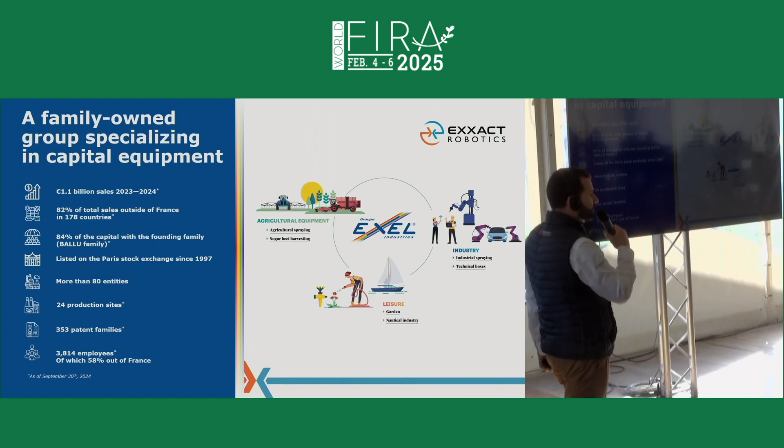More than 1 billion revenues, 80% of our sales are outside of France. However, the capital is mostly owned by a family. It's a family-owned business. There are many entities, 24 manufacturing sites, and more than 350 patents. The group today

Now, the group as a whole is important to know for you to have a background. EXXACT Robotics was founded in 2019, and the reason why it was created was to source but also help innovation mature in agricultural robotics. So it was born with a vision, if you will, and since 2019 we were able to create a 3S Spot Spray Sensor.

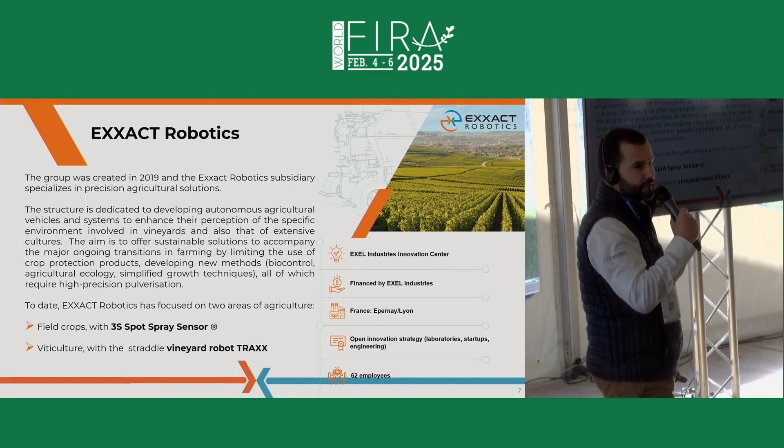It's a spot spraying sensor. That's one of our innovations, and also a gantry type of robot for vineyards named TRAXX. Currently, there are 60 employees within EXXACT Robotics, and of those 60 people, 25 are engineers or hold a PhD.

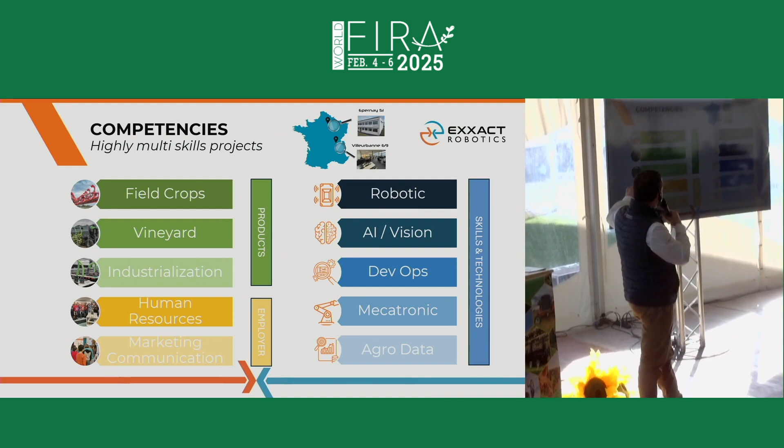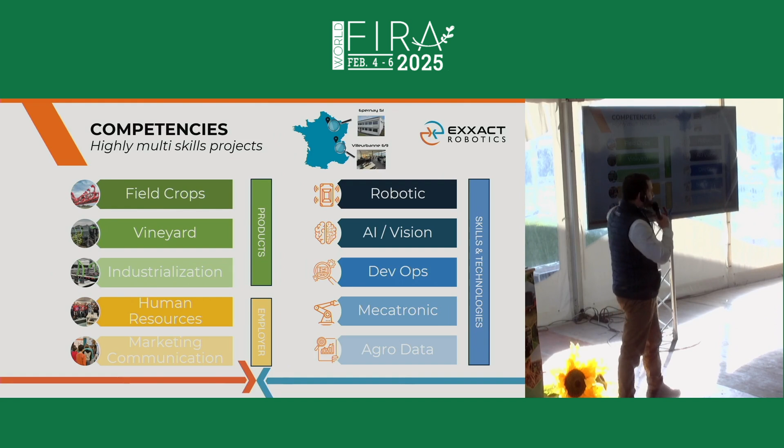So those are performance poles, if you will, the different poles. One pole is dedicated to products and large crops. Olivier, sitting here, is in charge of that pole. Then we have another segment dedicated to vineyards, one dedicated to industrialization. We have also all the support services with marketing, communication, HR, and then we have technical poles, robotics, visualization.

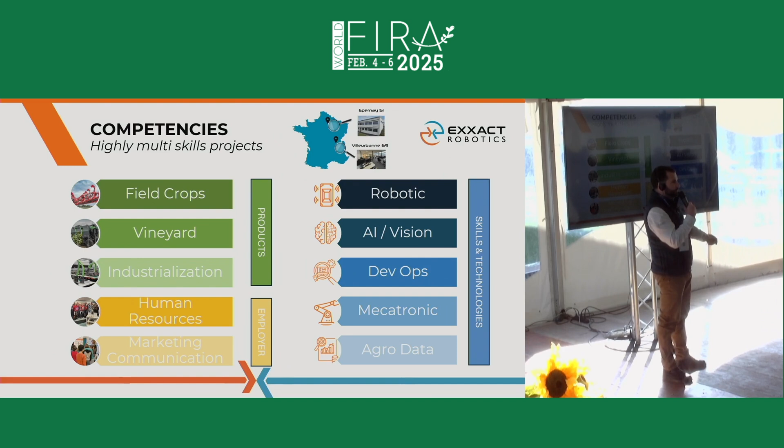Eva Stewart is in the room, responsible for that. Mechatronics with Thibault sitting here, and also a segment on agricultural data.

Now, EXXACT Robotics has an interesting history. The company is rather recent, but there's an interesting change in the structure. So in 2019, we started off with a vision.

The 2 products I mentioned were marketed in 2023, and again, we operate within a larger umbrella group, and our roadmap is such that we want to co-design our future innovation with the other actors of the group. So we operate like a startup, if you will.

So we are a startup in a larger group. And we also want to be perceived as an R&D center and innovation center for all the other brands of our group. So we're here to innovate for our brands, but we also want to attract new talents. We work on high-end technology, and we want to provide innovation to the Exel group to be more sovereign in matters of innovation. So we want to innovate in-house, if you will.

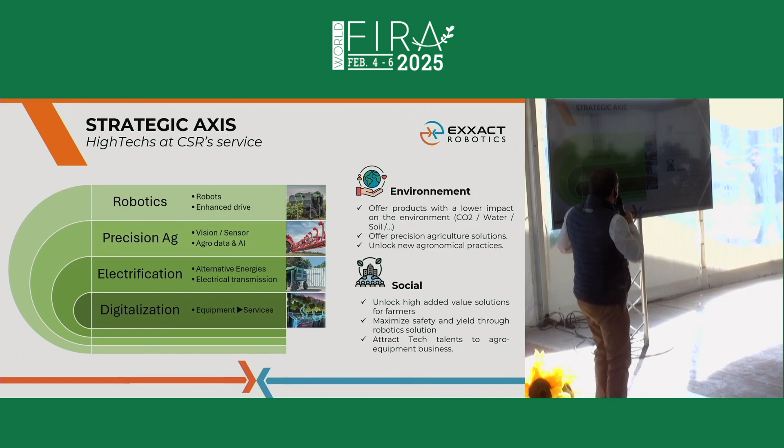Now, if I were to explain that in a few words, those are the different axes that we try to follow. Robotics, we want to develop and automate as much as possible agricultural robots. Precision agriculture is one of our areas of expertise. Olivier will introduce you to one of our latest innovations in spot spraying.

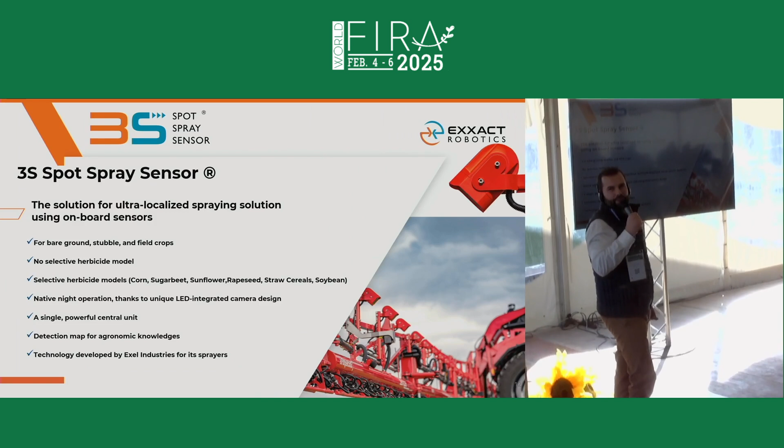Electrification, well, or rather, we want to use other types, alternate sources of energy, and then digitalization of the different equipment. I'm going to hand over to Olivier, who is the product manager and manager of the agriculture segment. He's going to talk about the spot spray module.

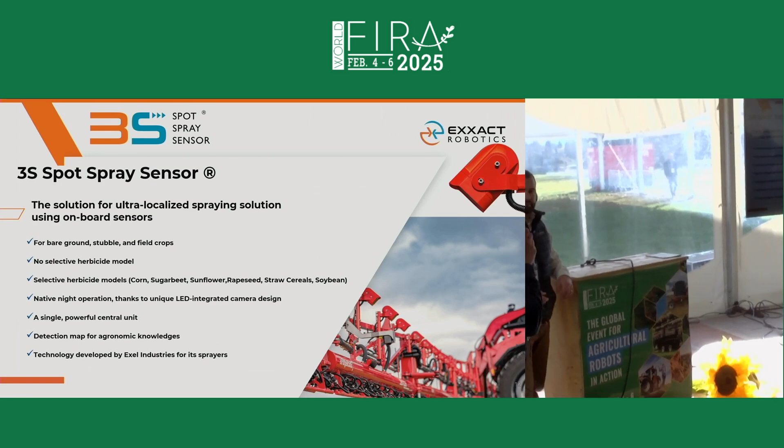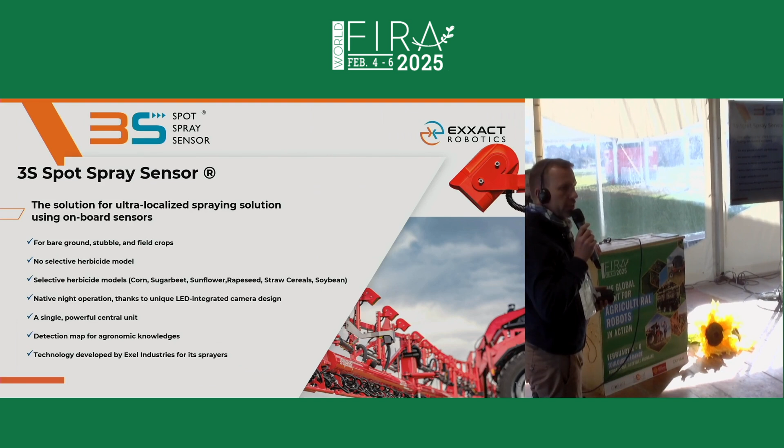So as Guillaume just said, we designed a localized spray device. It's the 3S Spot Spray Sensor. So cameras are fitted on the device, and you have real-time analysis, data analysis boosted with AI.

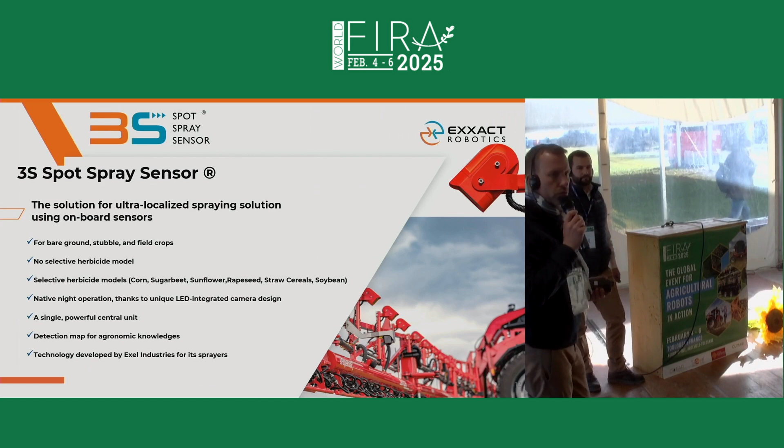So we operate either on soil already with crops, or empty plots, crops. And so we use selective herbicides. We are compatible with rapeseed, with corn, wheat, and soy as well.

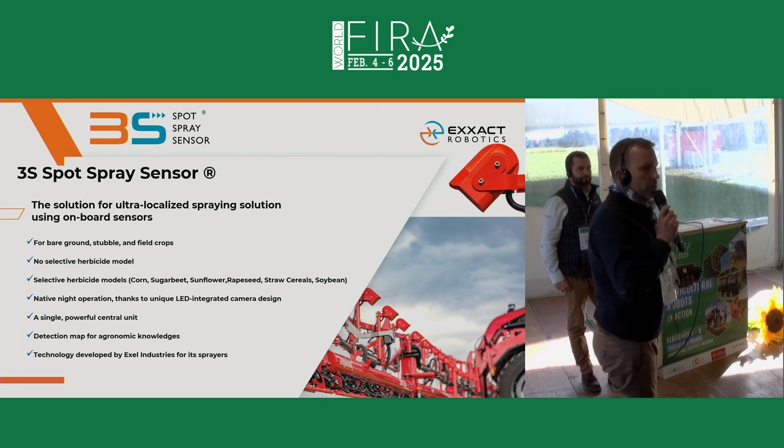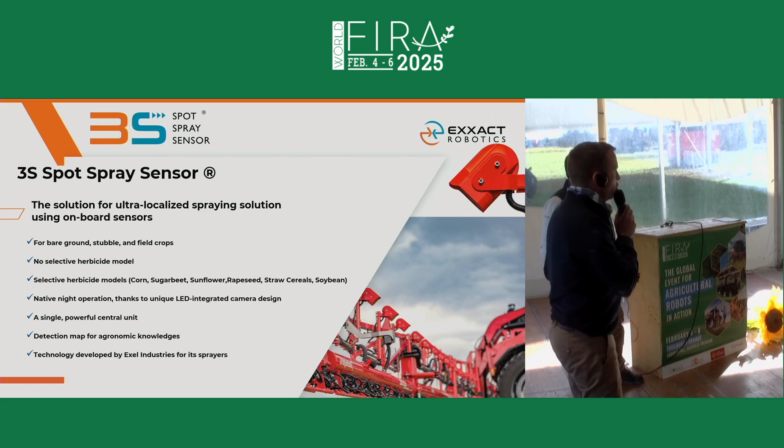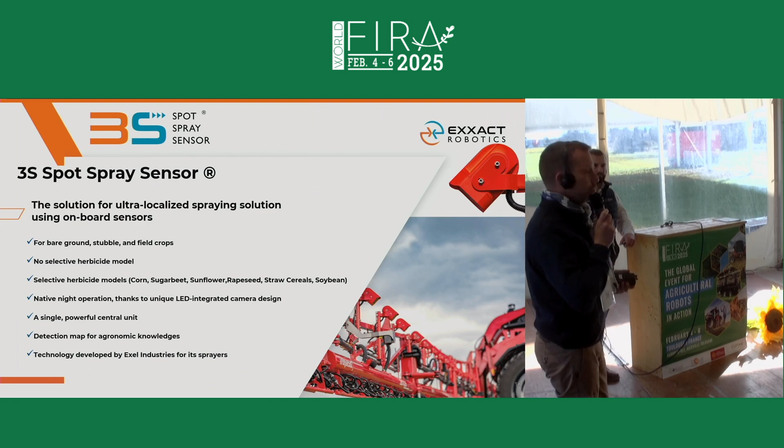One of the features of that system is that the camera is also compatible with night work. This is a strong demand by our partners. And so by design, there's an integrated light. And so you can operate the robot at night as well. What's also very important, we generate obviously quite a wealth of data, and again it's developed in-house. So this is the sensor that will be fitted on all of our sprayers.

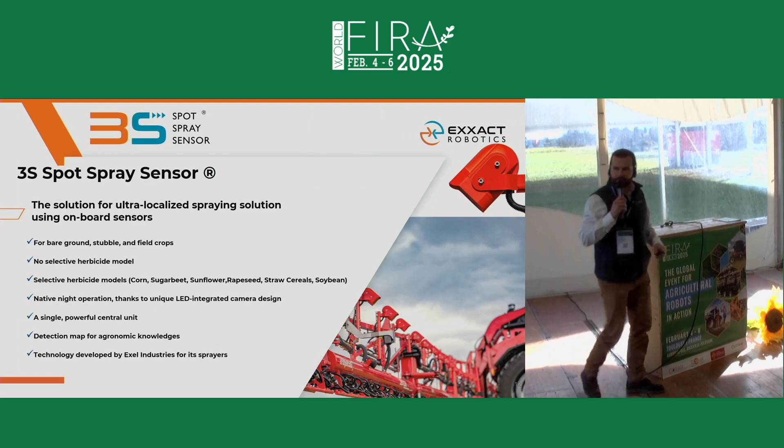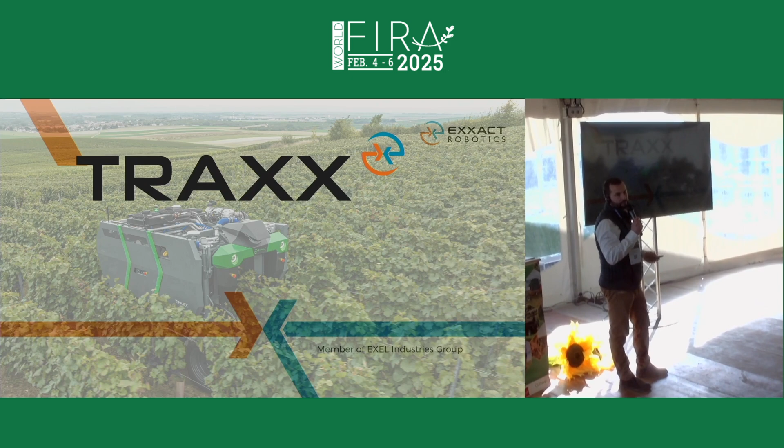Another innovation, the TRAXX robot. The robot is available at booth number 22. The robot will be demonstrated outside at 4:15.

It all started with an idea. We had many demands from the industry, for the wine industry. In the wine industry, there's a lot of manual work, maybe 80%, and the rest of it requires intensive labor.

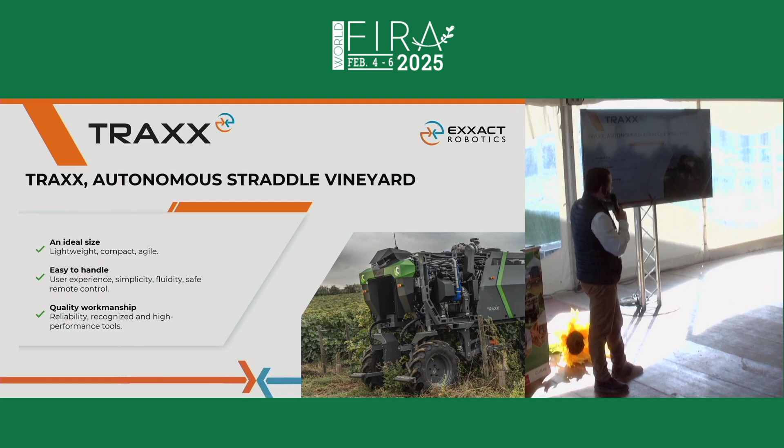There's a strong demand by the industry. They want to have the ability to perform those tasks in autonomy. The robot by design is light, 2 times lighter than a similar product, easy to use, and a robot thanks to

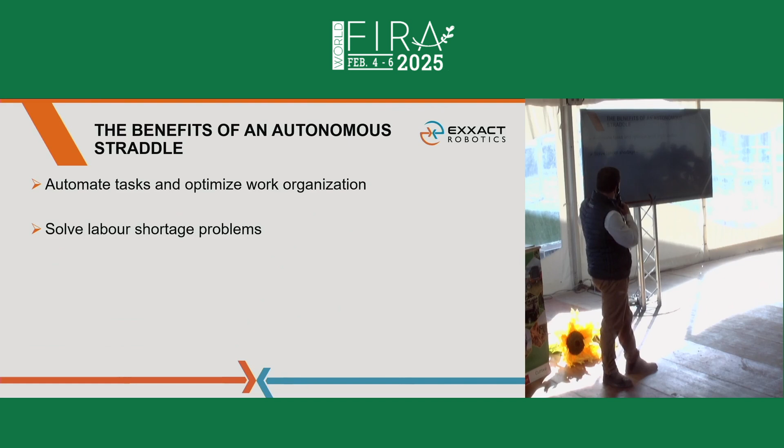which you can be accurate and do quality work in the vineyard. So as I said, the industry wants to automate the different tasks because of workforce issues and recruitment concerns. It's extremely difficult to find tractor drivers or operators, and the industry would like to become more autonomous and compensate for the lack of workforce.

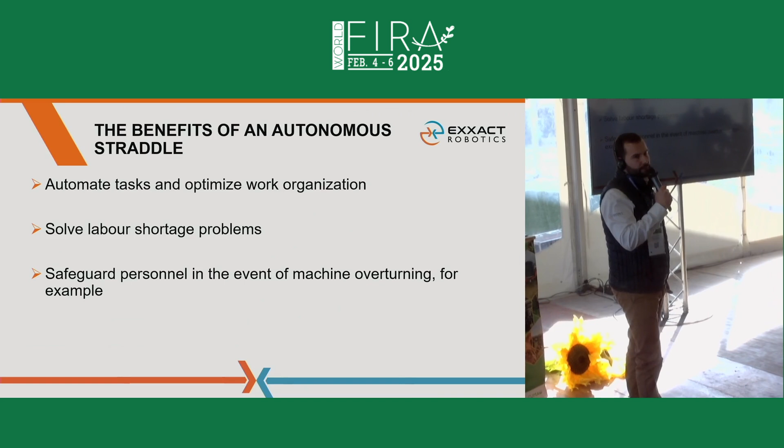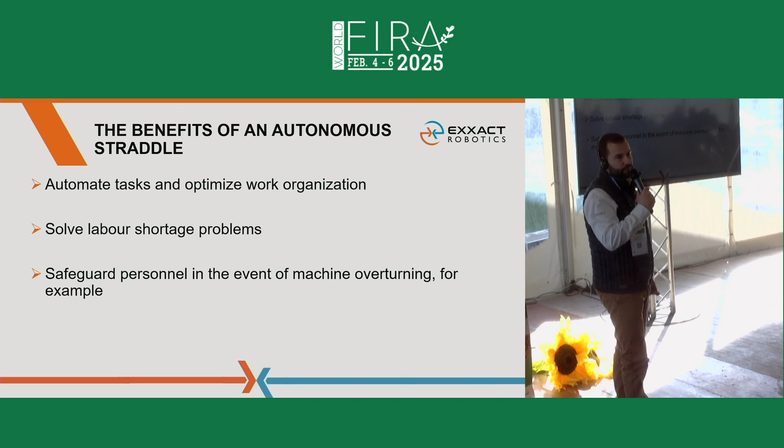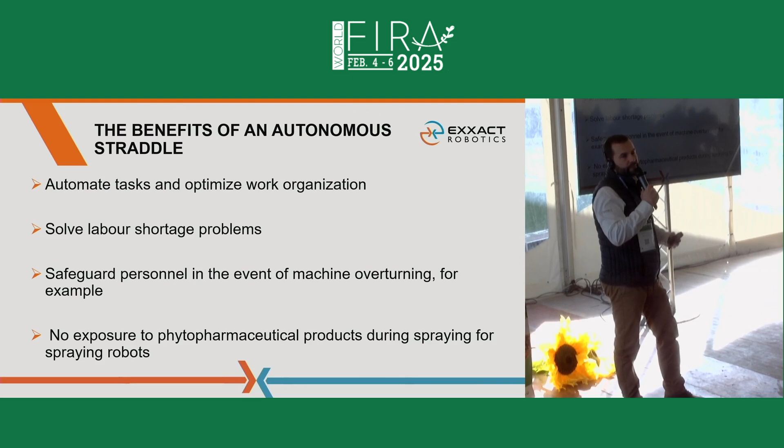As I said, the wine industry is very specific in that quite often plants or vines are planted on slopes, and we need a light device where the gravity center is low, and also of course it's a plus if there is no driver, because when the tractor is tumbling over, there may be a high risk to the driver. So again, there's a strong demand in that respect.

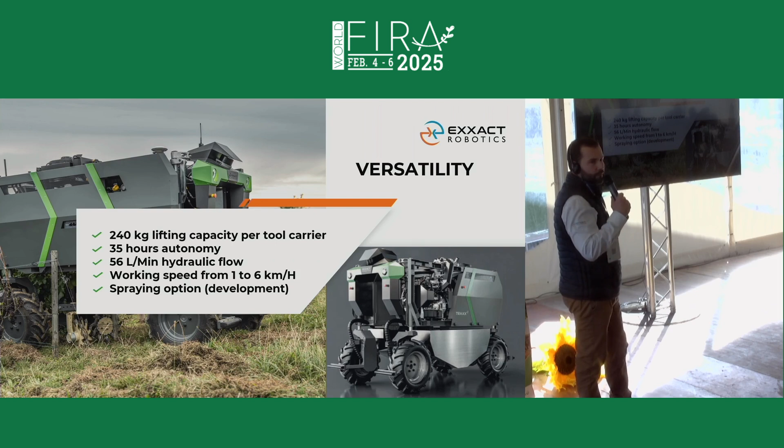Very quickly, in a few words, it's a straddling diesel robot, 56 horsepower, 4 hydrostatic engines, 4 wheels.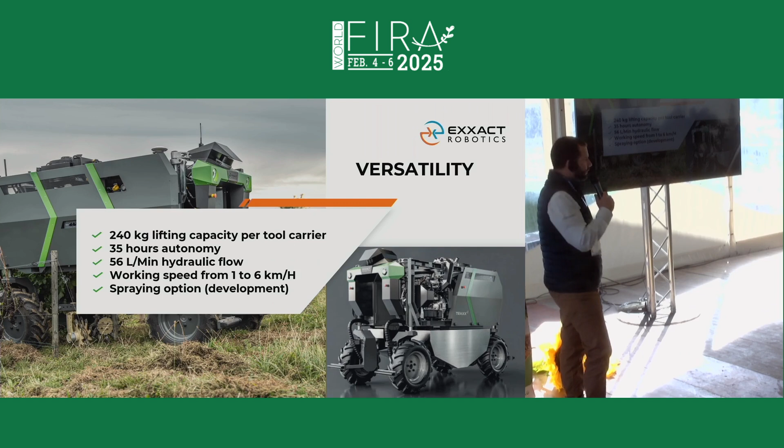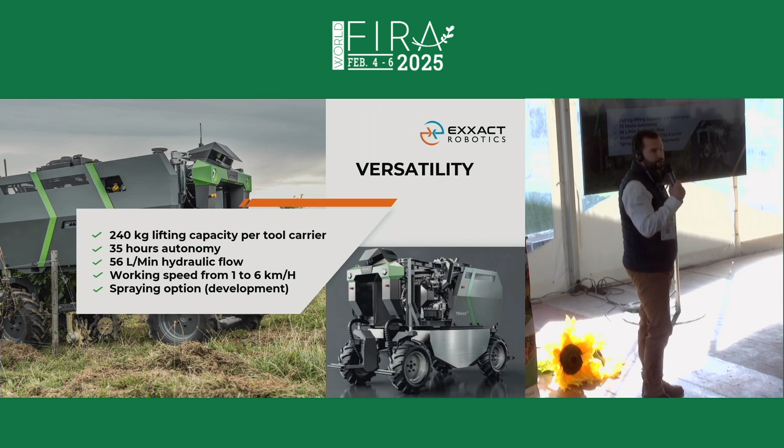The autonomy is 35 hours, so you can drive between 1 and 6 kilometers per hour. You can lift up to 240 kilograms of implement, and we are also currently developing a new option, a spraying implement.

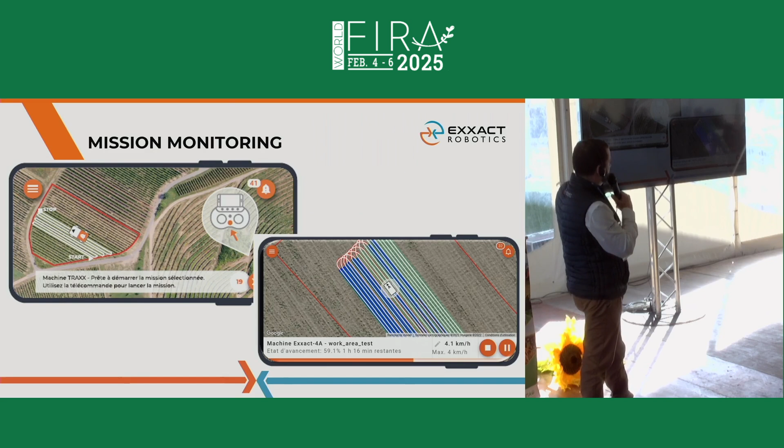Concretely, we're talking about an RTK guided device. So you first need to map out the plot, but then there's a cloud-based interface which you can manage via a smartphone. You use a remote control, and it's autonomous in that you can start the missions directly from your smartphone.

If you'd like more information on TRAXX, do not hesitate, it will be demonstrated. Camille on the line is the project manager, he will answer any technical question you have on the product.

Today, this innovation is mature, already industrialized and marketed by Tecnoma. In the roadmap, if you remember, I explained that what we do is create something innovative, and then we transfer the project, if you will, when it's ready for market.

Another option is concept H2, more for explanatory purposes, where we try to assess the possibility of using alternate energy resources. The objective was to use a hydrogen battery and explore its capacities and potential. So it's a TRAXX robot, but instead of a diesel engine you have a hydrogen generator, and we are also trying something even more optimized. Inside, we want to study the entire hydrogen ecosystem from a technical standpoint, but also the safety features, and think about the entire ecosystem, like where you're going to source your hydrogen.

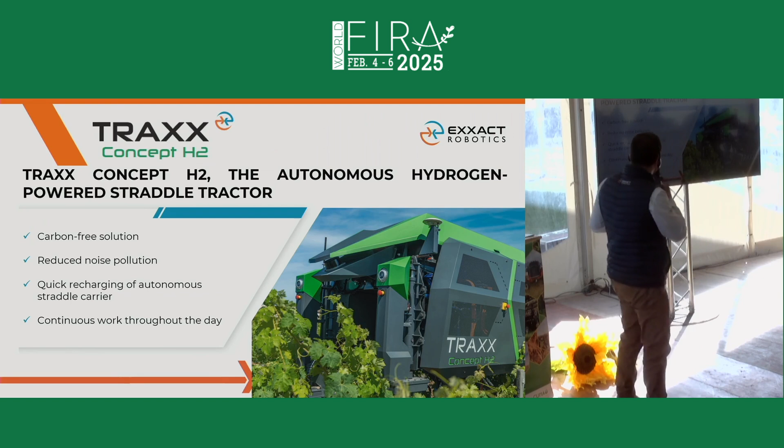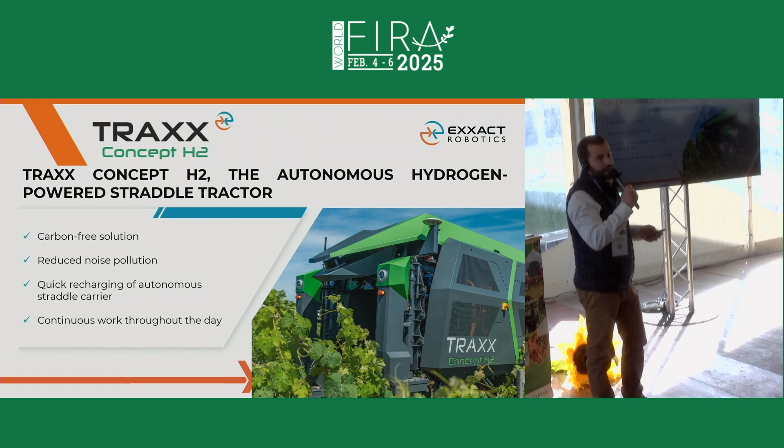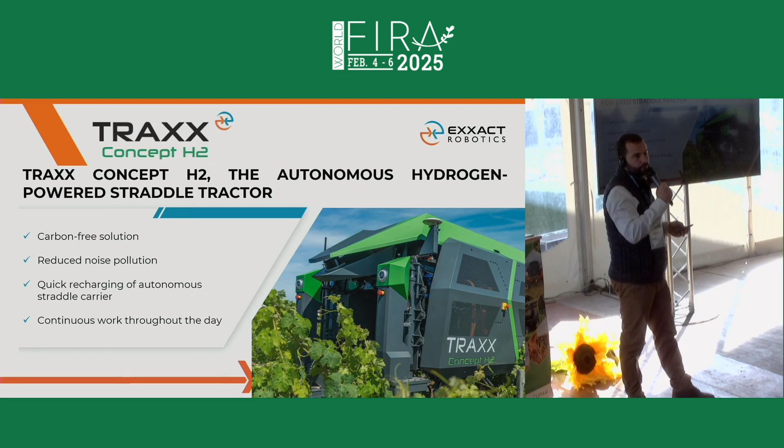When we look at the solutions, obviously we want to reduce our carbon footprint, but we also want a solution that is easy to charge up. It's a concept, it's not even a prototype, it's for explanatory purposes. For 10 to 12 hours of work, the load up time is 15 minutes, so it's very quick to charge up.

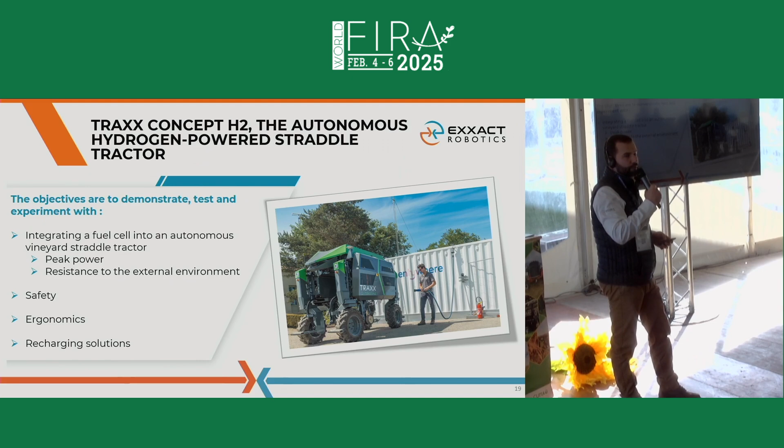This is the second iteration of this concept. Again, it will not be a product on the market, the objective is really to assess the situation, to clear the ground and see what can be done. Our R&D team is working on this, Camille is in charge of this project. So please, if you have any very technical question, go to booth number 22 and ask Camille.